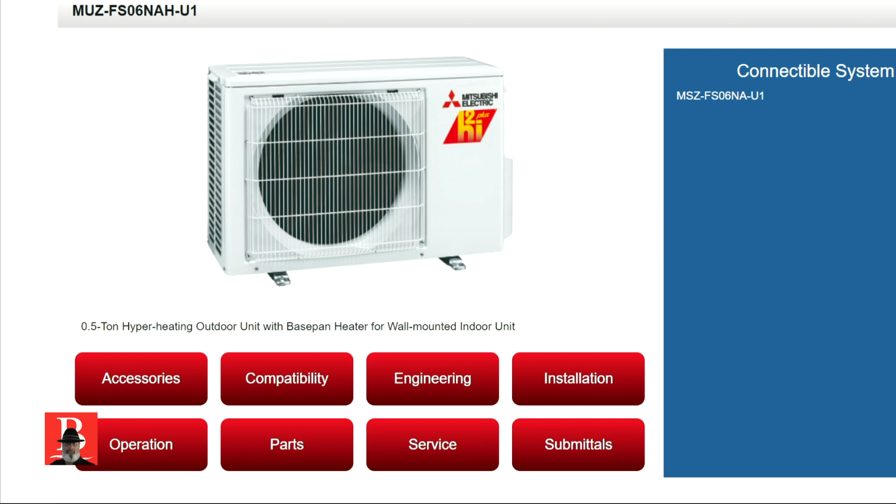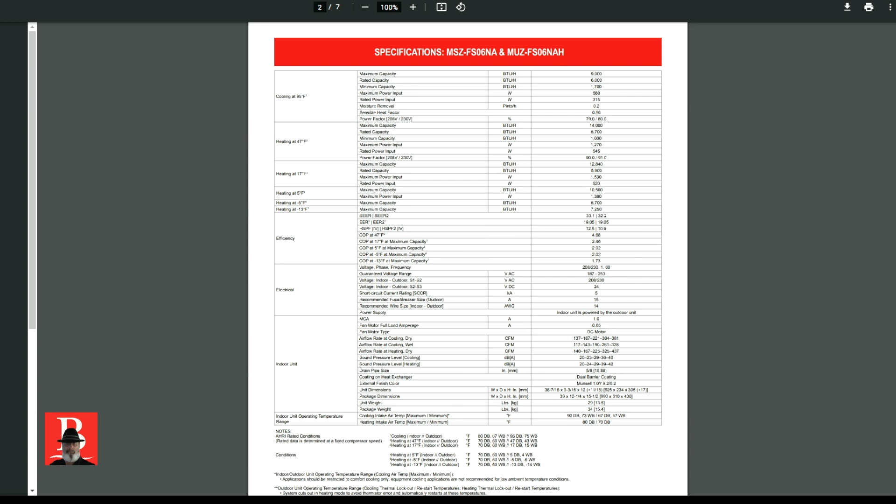Now that we have this adjusted for better viewing for you, we want to look down here. Let's take a look at submittals right off the bat. Right there they are. And we'll look at this sheet. We're going to pull down to the specifications of the condensing unit. I'm going to plus it a few more times since I've got my head out of the way. And what I want to look at are the heating and coolings. We'll look at those right off the bat.

We see that this one does in fact have a rating at negative 13 degrees. Now here in Tennessee where I live, that's not a realistic problem on a regular basis. We also have it at minus 5 degrees. We did see some cold weather in December, or actually that would be technically last year. So we did see some minus 4s, and I may have seen a minus 5 back in that day, but you want to look at that capacity for the heating so you get a good idea, how is it going to actually perform during cold weather?

Is it even rated for negative 5 degrees? What is the minimum temperature? Is the minimum temperature on the unit you're buying for $800, $900 going to be rated down that low? Or how big of a drop in the heating capacity do you get from this? Now, if we go up to heating at 5 degrees, which is very reasonable for almost all of the year, we're going to have at least 10,500 BTUs during the heat mode in the winter at 5 degrees. So that's a big thing that you want to really look at there.

When you see that, you want to look at both your heat and cool rating if you're getting a heat pump. I mean, that's common sense, I would think. But do you have that information available? Do they publicize it, or do you have to then go ask for it? Or is it where you can find it publicly like Mitsubishi does, where you can just go look at it yourself versus having to beg for the information?

Let's go back. Cooling, we have maximum capacity is 9,000, that's 3/4 tons. This is rated at half a ton, and that's more than what I need. So if you oversize a unit, you can find you have some problems.

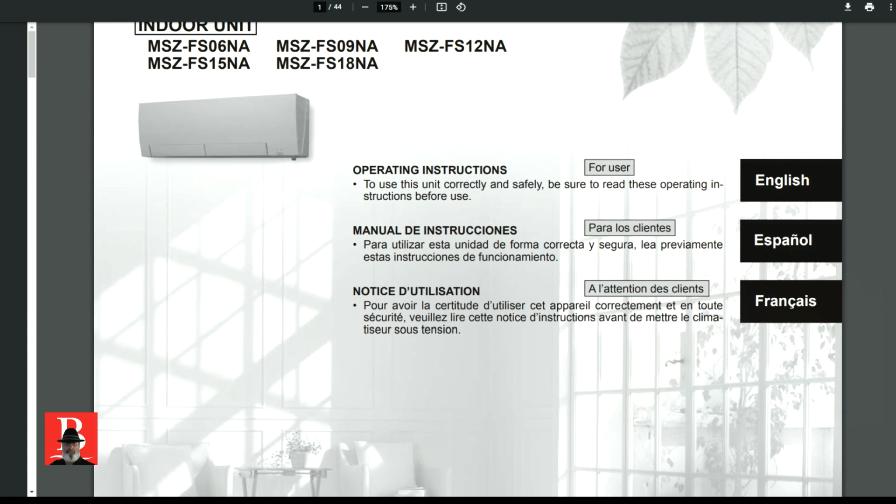So let's go back and look at the specs again. Now we can look through this at our leisure, and we can look at the outdoor unit. The indoor unit, if I pull it up, talks about what it has, this interface. Now this thing has something that's pretty cool, and we'll pull up the operator's manual in just a minute, because we're going to look at the features that this unit has that some of the others may not have. This indoor unit is really a nice bit of kit. Mitsubishi did a good job with it. It has probably more features than you'll need or ever want to have. I think I'll go ahead and put my face back up there.

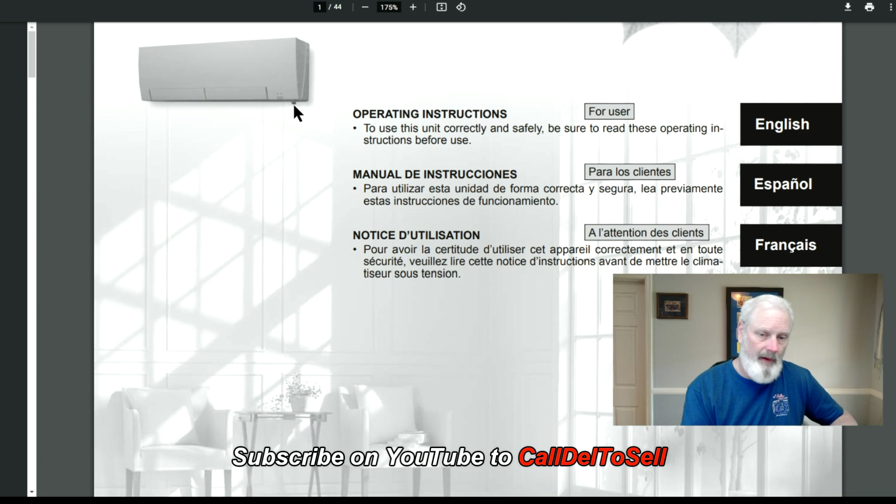If you can see from this picture, this little nub that hangs down right here. This is, I think, the receiver for the remote. This down here is a little infrared scanner, and it rotates, scanning the room. And what it enables this unit to do, because you see it's got 4 vanes. I didn't highlight that, but it definitely has 2 big vanes. There's also 2 smaller vanes in here. It can control the airflow in the room. Where you put it can make it a lot more comfortable in your installation, depending on your particular needs. Maybe you can't put it dead center of a room.

Well, if you remember when we did the mounting video, we talked about setting it up. We could get it closer to the ceiling if we were center of the room, and if it was to either end, we'd have to mount it a little bit lower. And you might think about that without necessarily having to follow the strict limitation of either extreme. If you have to be a little bit more off center, maybe you're a little toward the third of the room instead of the actual corner, you might be able to have it just a little bit higher than all the way down, but you need to follow the instructions.

So if we look at this, what this thing does is it scans, and it has the ability to see where you are in the room, because it has some neat little functions, such as in cooling mode, perhaps you want the air to hit you directly and to always be like a fan blowing on you.

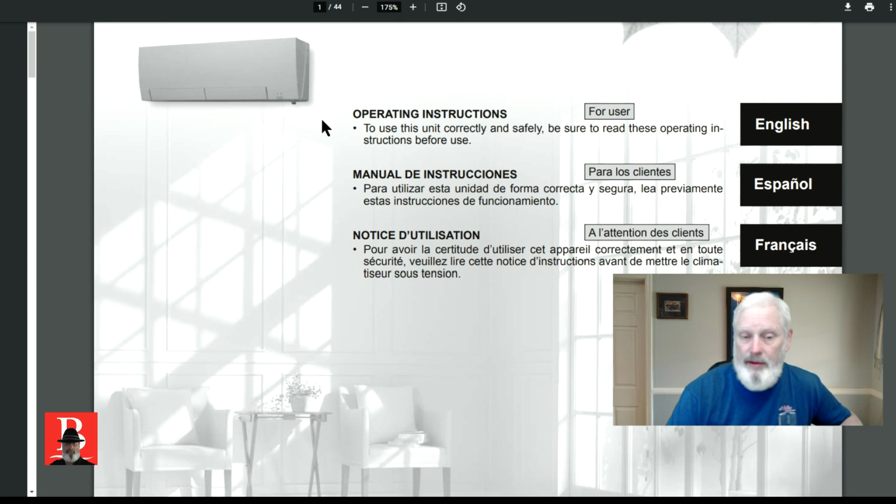Or maybe in winter, you want it not to be on you directly because, maybe the BTUs will be there because it's a heat pump, but maybe it feels a little breezy on you and you'd rather not have the evaporative cooling off your skin. Well, this one allows you to have direct and indirect modes. That's one of the things it does. It can also do some setbacks if it doesn't see warm bodies moving around. And it does have some features that some of the cheaper units probably are not going to have.

Let's scroll through here a little further. It does have a large remote control, and it's kind of like your TV clicker. This is showing with the little slider in the down position. It slides all the way up. It kind of stops halfway. Gives you a good little breakdown here. Here's your remote control receiving thing that I told you about. Your indicator lights, your 1 and 2 lights, and your i-see sensor. That's the one I just talked to you about.

Well, this is a fairly complicated thing. We're not going to hit everything in it, but I want to show you some of the features so that you can say, well, the Mitsubishi had that, which is a pricier unit you probably will find, versus some of this stuff you might find on Amazon, intended for DIYers, but may not even have a warranty on it because they're selling it to a DIYer, and it's in their warranty information. They're not going to warranty it for you.

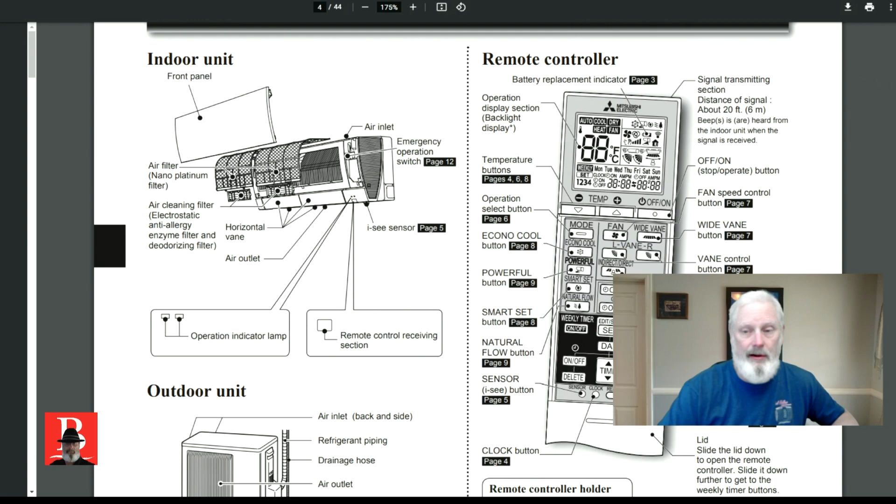So you do have to be either a professional, or you have to have a professional install a lot of these, whether they're DIY or not. So that's an expense you need to also add in there. You're not going to get something for nothing, is the point. All right, slide on down. It tells you how to set the clock, how to put the batteries in. Pretty typical stuff. Let me slide this back up just a little bit.

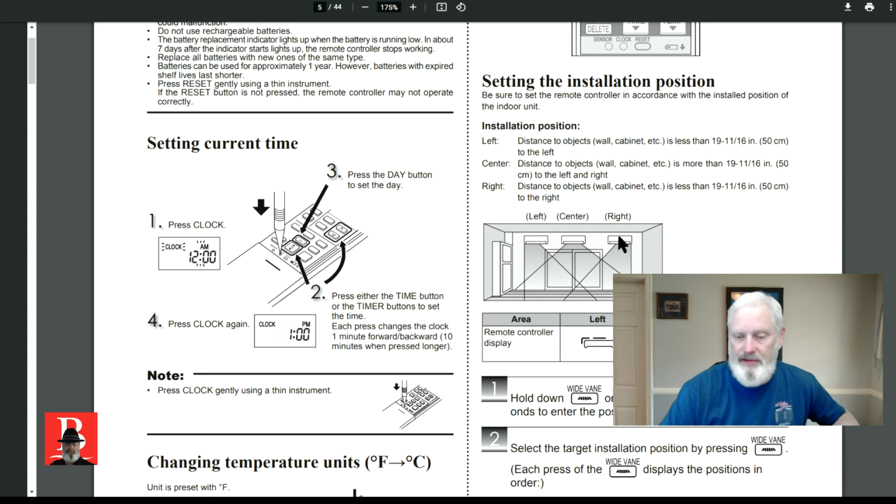Setting the installation position. Now, it won't know if you don't tell it. And as this picture shows, not all of them are actually capable of adjusting for its position in the room. Let me slide it up just a little bit. Now we're back to full screen on the center panel, and we can see that we can set it either for a right mount, left mount, or center, and that's going to be involved with how it handles the air distribution through the room. Just tell it where it's at so it knows where to look and where to put the air.

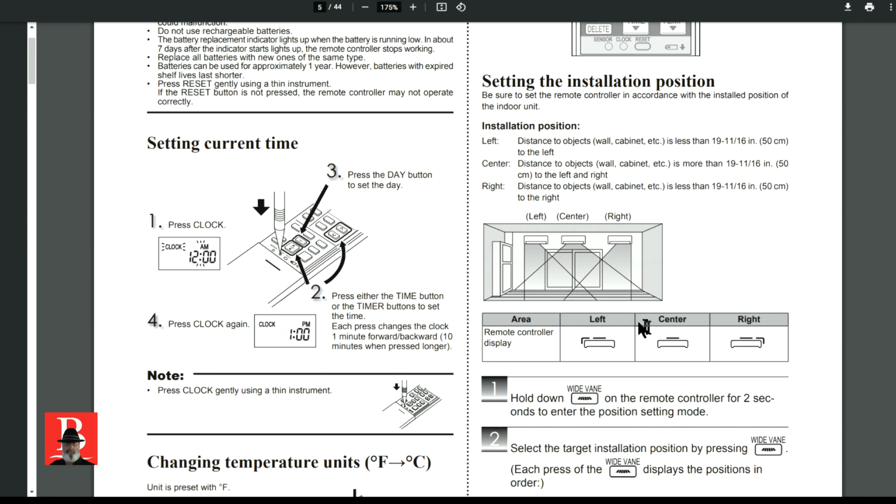Because maybe you don't want a perfect fan pattern like this. And if you're stuck in your particular home having to put it right or put it left because of something that you have in the middle, you don't want all your air constantly smacking against this side and blowing back over here. You want it to cool the room as best it possibly can, or heat the room as best it possibly can. So that's one of the little features that this thing will do that perhaps some of the cheaper, less quality units won't do.

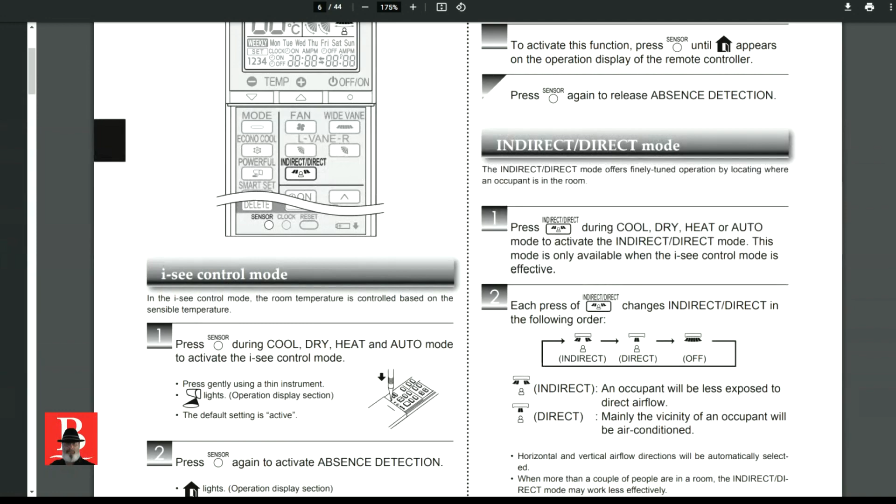Absence detection, that's sort of like your occupancy sensor on your commercial building where you walk into the bathroom and it automatically turns your lights on because it knows somebody walked in there. It works like that. And we have, of course, indirect and direct mode. Indirect mode will blow it to the sides. Direct will kind of push it down toward the middle. And of course, the sweep means it'll go across the different rooms. Now, I don't know if it actually follows the human to, say, this corner and shoots the air this way or not, but it does have the ability to at least do indirect and direct mode.

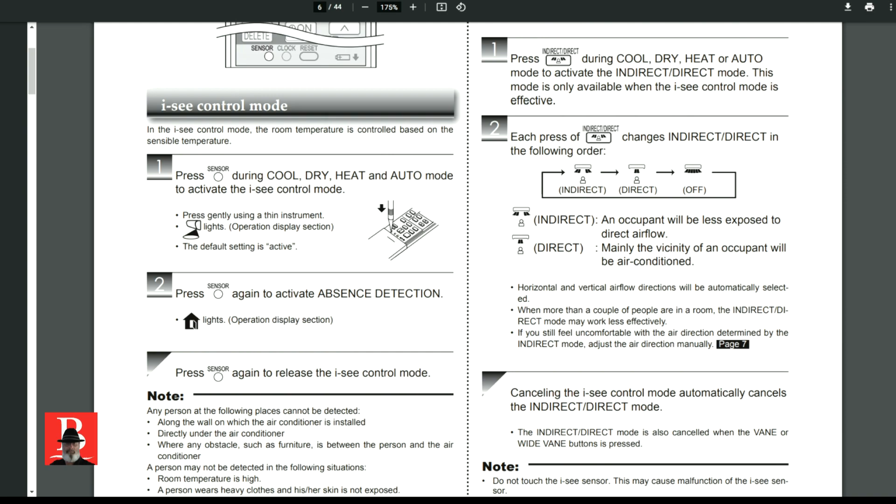Now, on the operation, you can set it to do cooling only, heating only, dry mode, which is a combination of both of those, designed to keep the temperature but run the air conditioner enough that it keeps the moisture down. It has to sweat to get the condensation off to dry the air out. So that's going to be somewhere in between the heat and the cool, and look where they put it. And auto mode is where I put it, and that's a big feature for me, the auto mode.

Because putting it in auto mode, you don't have to do your seasonal switchovers. Perhaps some of the cheaper units that you might find, it's like my central units. With the thermostats I have, it comes on either in heat mode or cool mode, and I have to manually switch it over. This is smart enough that you can put it in auto mode, and it takes care of a lot of that. Let's go back again.

Auto mode. Let me slide that back up so we can read that together. Auto changeover, and it tells you that's exactly what it does. During auto mode, the unit changes mode from heat to cool and back and forth when the room temperature is about 4 degrees away from the temperature for more than 15 minutes. So if you're one of those people that has cool nights and warm days a good percentage of the year, that's a pretty neat little feature to have. You might be willing to pay for that versus some of the other units.

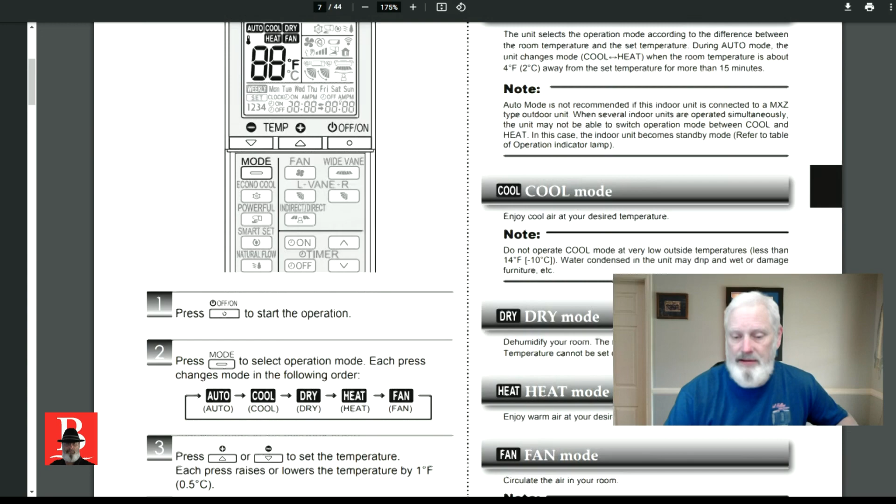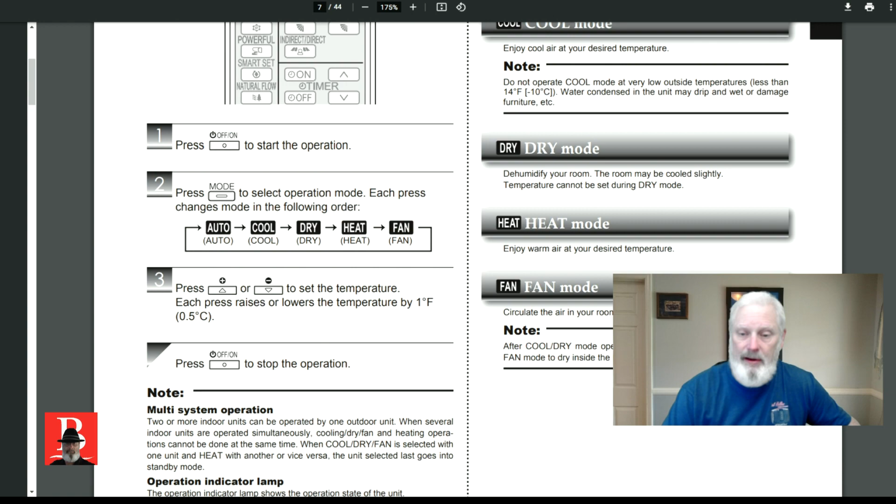Look again, cool mode. Well, that's exactly what we think it is. Dry mode, it dehumidifies the room. And it says here, the room may be cooled slightly. Well, that's because it has to sweat in order to take the humidity out. And that only happens in cool mode. Heat mode, enjoy it. The fan, that's just straight like any other fan. It talks further down in here about the indicator lamps. We don't need to look at that too much.

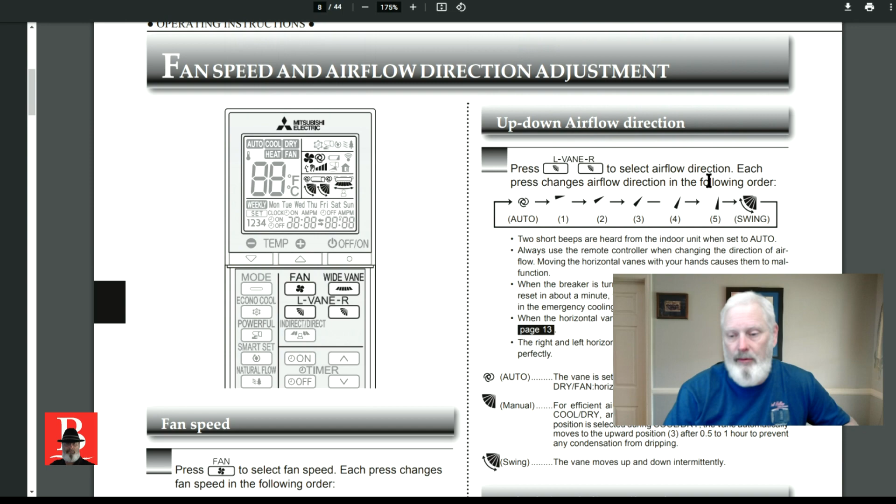It also will swing left and right. And if you'll notice, you have a left vane and a right vane because this is a 4-vane type system. So there's your swing, there's your manual. It'll give you the little up and down arrow, the back and forth arrows. And it says, okay, left, right airflow direction, shows you your swing.

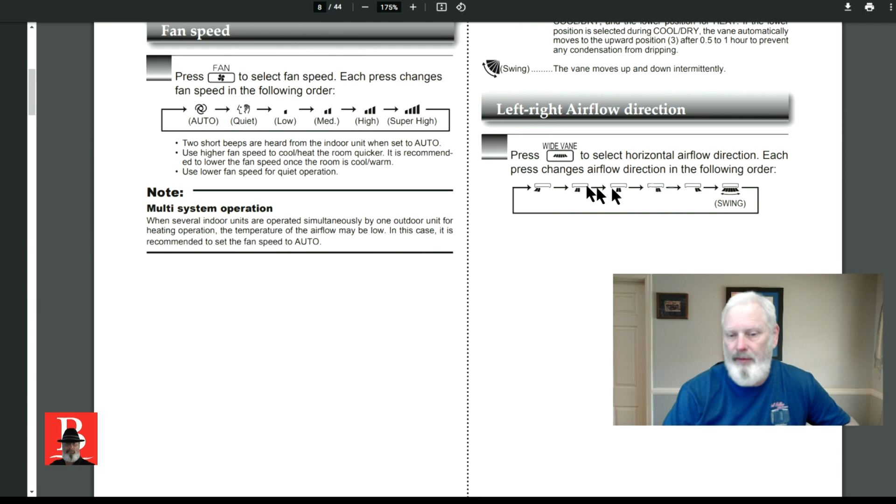This is not a cheap, I would call it Amazon, unit. I don't want to ding Amazon. I don't want anybody to think I'm dissing anybody or anybody who sells on Amazon. But this is not a low-end unit. Auto, quiet, and it is very quiet on auto. You can manually set it at these different fan speeds, but I just leave it on auto, let it do its thing, and I can barely hear it where I have it installed because it's a fairly small space.

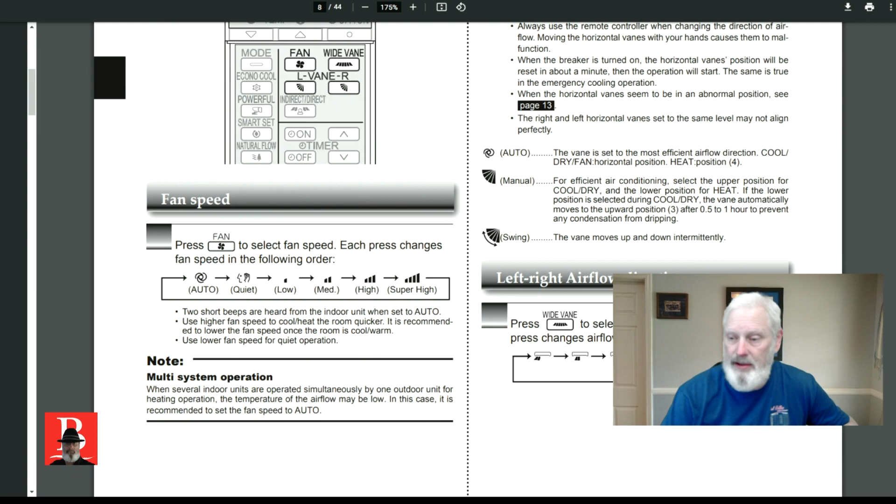Now, if we come down here, we'll see some other features you might look for or ask about. Smart set. During heat or cool mode, it starts smart set. It says smart set operation cannot be set on the weekly timer. Does your unit have a weekly timer? Do you have the ability to set a schedule so that it's saving you money while you're off at work? Okay. Econo cool, that's a little different thing that they have that the high efficiency allows them to do. Let's see what we have here.

Timer on off. You can set it to go a certain length of time. Does your head unit have a timer that you can set it to operate on that time? Like here's your day of week type situations. You get an idea. It runs just like a full thermostat. And this thing can actually be used to hook another type of remote to it. You can control it off your phone.

It takes another board, and I think to put a different type of thermostat, like if you wanted one that works like I have, the Nest system I think I have. I have the Nest system. I think it has a second board you have to buy to go with the other board, the cloud board, in order to hook your Nest to it, but you can do it, then control it back through that, if I'm not terribly mistaken. I haven't really investigated that because I'm not going to use it for that purpose.

Here we have the filters. It talks about the filters. It has a deodorizing filter, kind of a carbon filter, has an electrostatic filter, and just sort of a pre-screen type of thing to catch things with. I'm not a Mitsubishi Electric salesman. I'm not trying to push it on you. I'm trying to give you some information in this fourth video that would help you in your selection decision.